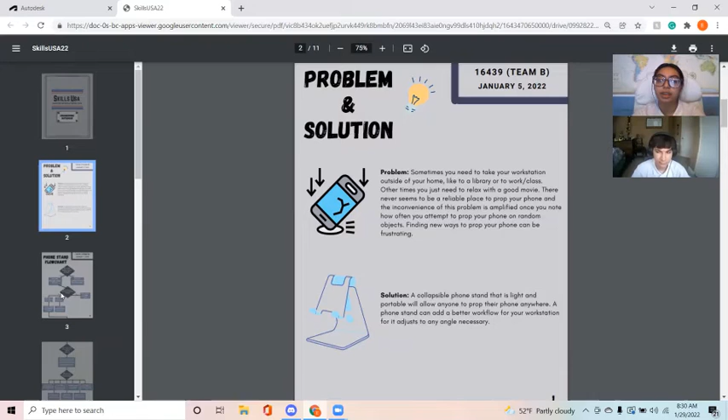Today we're going to be talking about our project that we decided to tackle for regionals. Our original problem is that we wanted a transportable phone holder, because a lot of times there's not places to hold your phone when you're out or studying at the library, and sometimes you just need to prop it up on something. Having to prop it up on random objects can be very inconvenient at times, because it's always sliding off, or you have to use two books just to hold it up the way you want it.

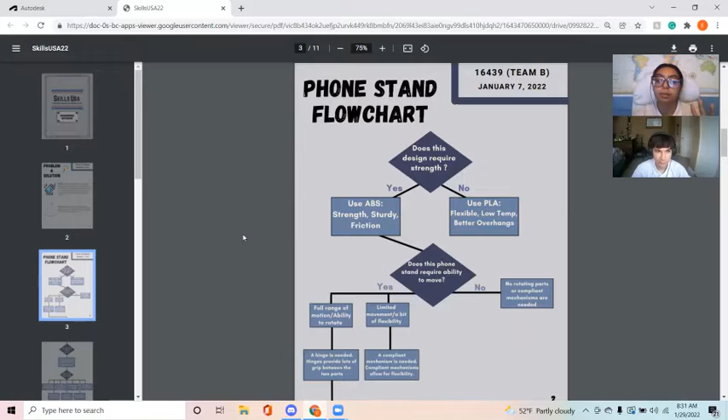For our thought process, we first started with what material we wanted to use. That was determined by how much strength we wanted. Since it has to hold a phone, which nowadays are very heavy, we wanted to use ABS because it has strength and friction, which is good for our hinges. We wanted a full range of motion so we could adjust the phone to any angle, which is why we decided to have a hinge that would provide better grip instead of a compliant mechanism that would give some flexibility but not the full range we wanted. That led us away from having no rotating parts or compliant mechanisms at all.

Then we wanted to determine the size. We wanted the product big enough to hold a phone, but not so big that it would distract from the point that it was supposed to be transportable and compact. So we tried to find that sweet spot in the middle.

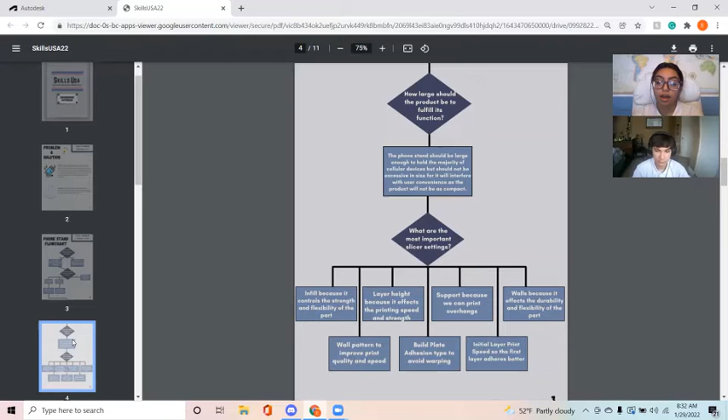Some important slicer settings we noticed were infill, because that controls the strength and flexibility of the part, and layer height, because we wanted to minimize print time without hindering the quality of the product. We also wanted to avoid as many supports as we could, because they increase print time and can often lead to failure.

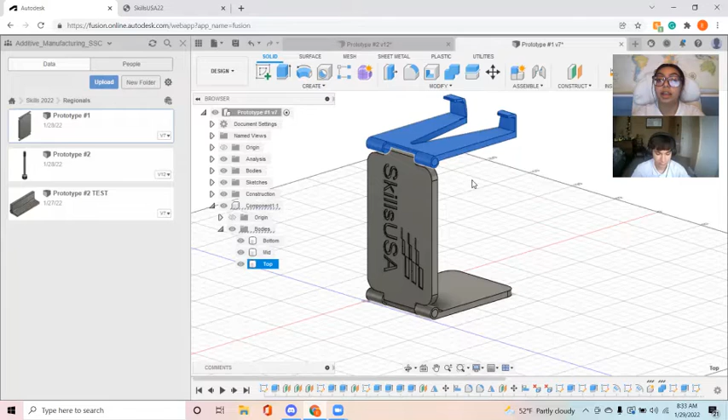For our first prototype, we went with this design with a bottom, mid, and top plate. Our original idea was to have print-in-place hinges that would snugly fit together, and the friction would hold the phone up. But after we printed it, we realized that wasn't feasible, since the phone weighed a lot and it couldn't rely solely on the friction between those two parts. Even if it worked the first time, over time it would gradually lose its grip, and that would not make a reliable product.

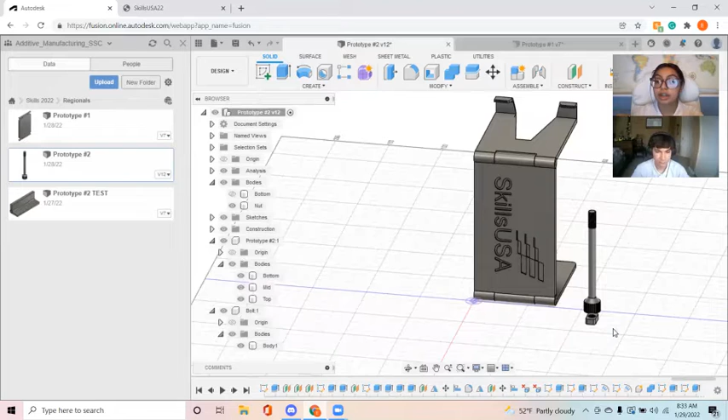We had a cutout here to minimize material and printing time, and also for style. For prototype 2, we made a couple of changes: we included a nut and bolt that crosses through the hinge and tightens, so you can tighten it at any angle you like. And we changed this part to have the plate be flush against the hinge, to create more friction that would hold the phone up better.

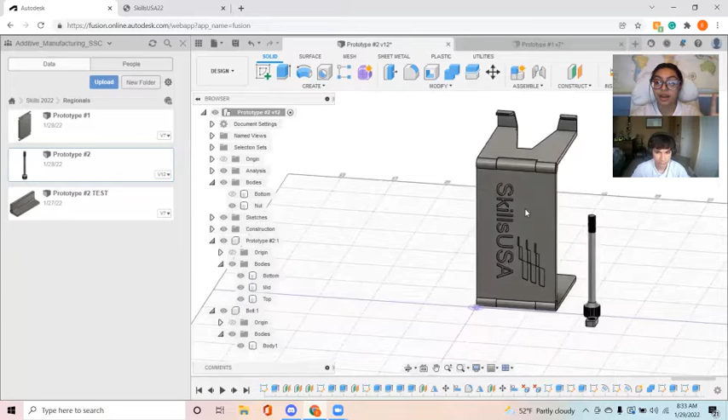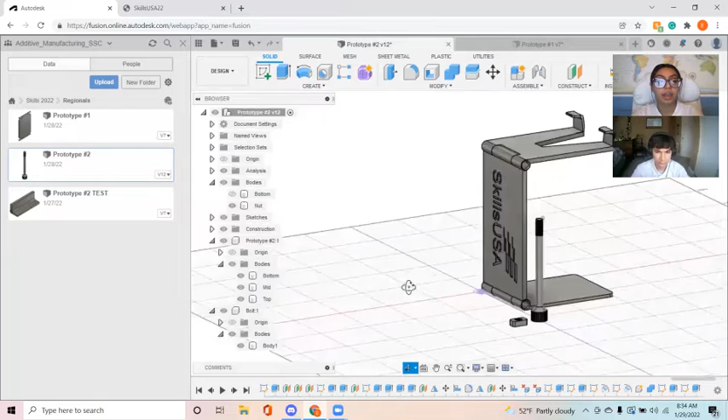We had the Skills logo on there for some style points, and also our contestant number. We changed the cutout because the V shape led to messy printing sometimes; it just wasn't as clean as we wanted. Once we changed it to more of a square cutout, that fixed it. And I'll be passing it over to Peter.

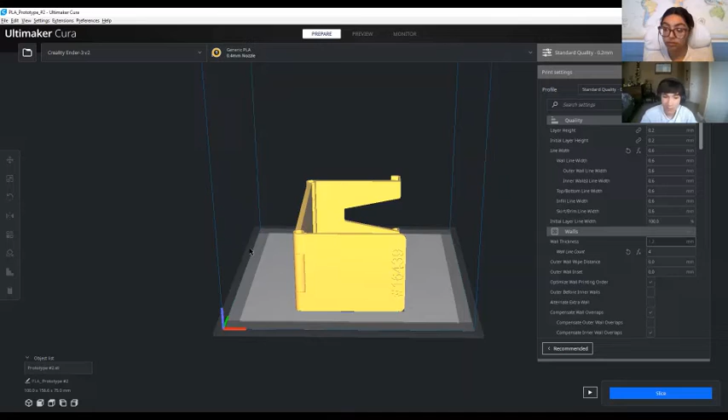Today I'll be talking about the slicer settings and the orientation. The main goal with this project was for it to be: you get it, print it, and you're done. We want it to be very easy to print. You just put it on your build plate, hit slice, and let it print. So we really did not want to use supports. I personally don't like using supports; they're a waste of material and add an extra hour of print time. When you get the file, it's going to be one file with the bottom, mid plate, and top plate.

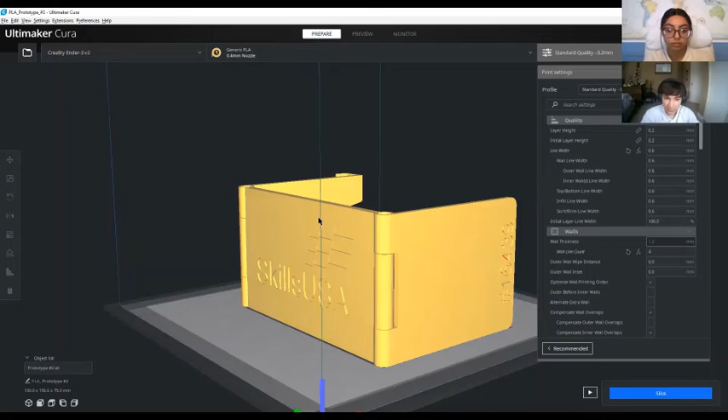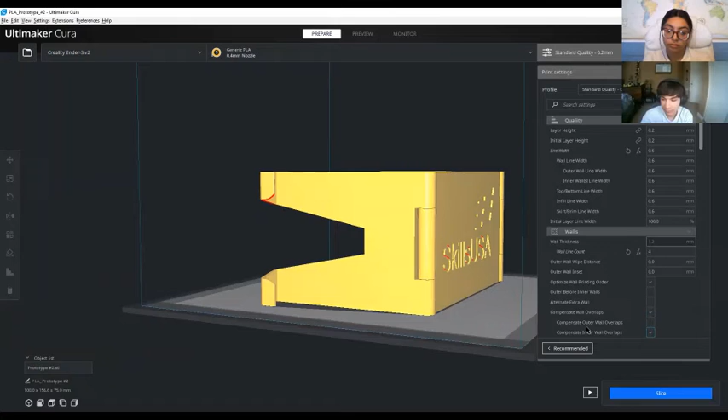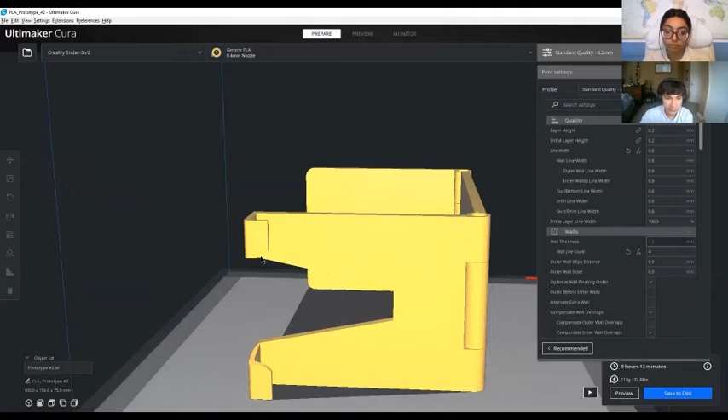The reason the hinges don't need support is because the mid plate actually acts as support. In the middle of the hinge here, there's a tiny gap to make sure the models don't fuse together. Also the angle here is a perfect 45, so when I hit slice and then preview, the model gradually builds up on it. We also added a little chamfer on the little hook here, so it also didn't require any supports. That's it for the main plate.

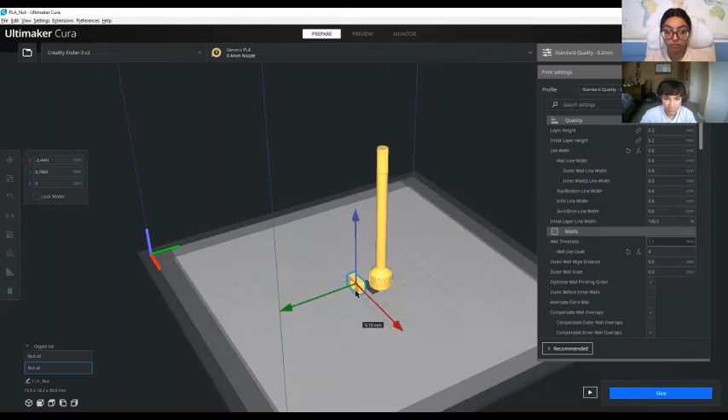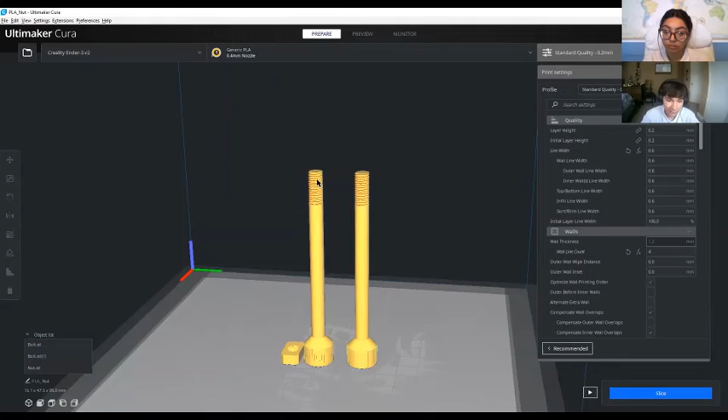For the nut and bolt, we also want it to be very easy to print. With this one, we do have to change the orientation quickly, but if you just set arrange all models, it should do the orientation for you. I highly do not recommend printing more than one bolt, because having them next to each other could cause a lot of stringing between the parts, messing with the threads. Considering the whole model stays in place with threads, it'd be very inconvenient if the threads didn't work because of stringing.